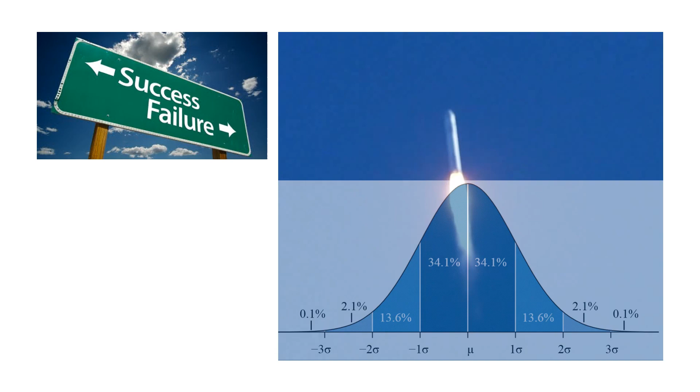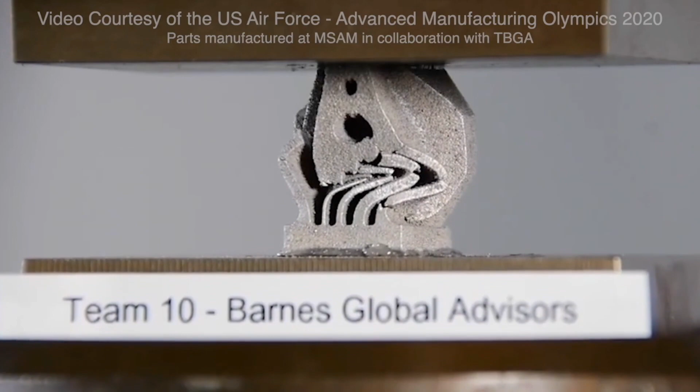Exactly how something fails can tell us a great deal about it, about its material properties, that we can never learn from just looking at the outside of a component. However, since I'm not a material scientist, I'm not going to be spending much time today looking at the impact of material properties on the failure modes of additively manufactured components. But sensing the disappointment if I don't talk a little bit about material failures - here is an example from a 2020 Penn State paper where we have a vocabulary to describe process flaws and a taxonomy, and we're going to need exactly these kinds of things, a vocabulary and a taxonomy, to describe all levels of failure in additive manufacturing.

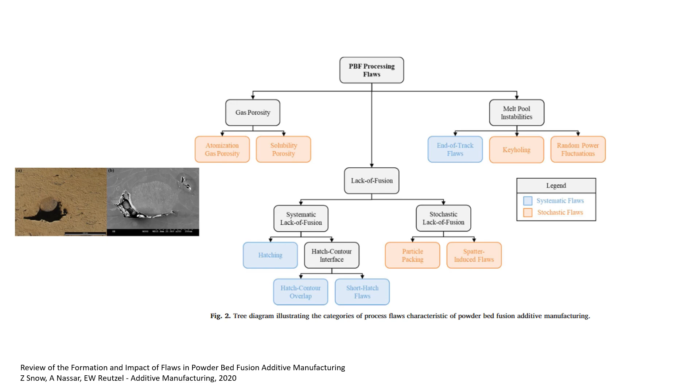So I said earlier I was going to use aviation to frame a lot of this discussion. If we look at failure in aviation, in the early days, back in 1903, nearly 80% of failures were machine related, whereas today, nearly 80% of failures in aviation are human related. We're going to find the same is somewhat true in additive manufacturing, where our state of evolution is probably between these two points.

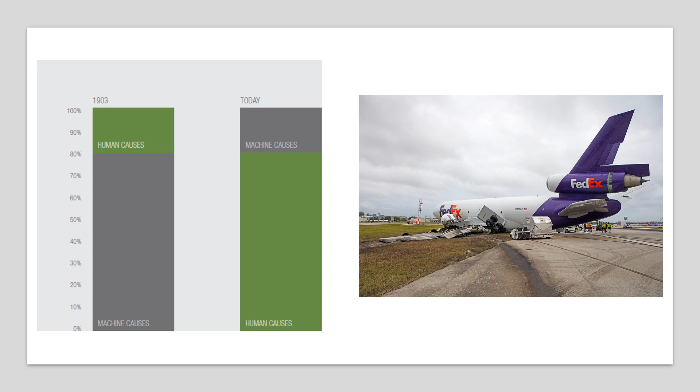Building on the previous slide where we saw that 80% of aviation accidents are human related, here Siemens is saying that potentially 80% of additive build failures are due to incorrect build orientation and/or support strategy. They have a software solution for this, and just as aircraft may have some very sophisticated software solutions, still oftentimes it's humans that are doing this. So maybe we have an 80% human related failure cause here, which is build orientation and support.

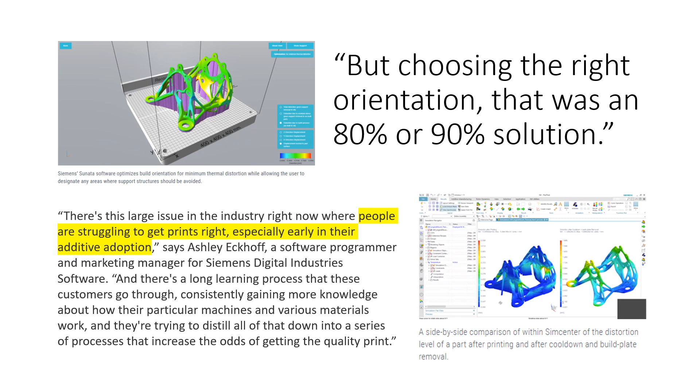So let's have a look at that in a little bit more detail, to make this real. Let's look at how this 80% of build failures or small failures may be related to orientation or support. This is an example from ADEISS, a medical device. The build orientation is as shown in this image here on the left - up is the build direction, and we have a fairly organic shape, and then a prismatic shape. After it's been printed, the rectangular shape here has some distortion, and this turns out to be unacceptable.

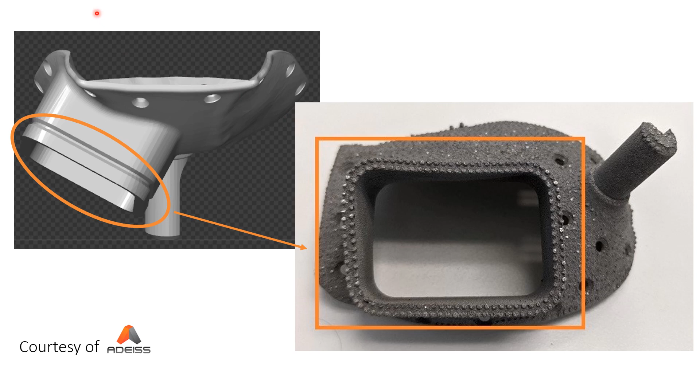This is a small failure, not catastrophic, but the question is, what was the cause of this distortion? So what we've done here is use simulation with a nominal 50mm, 1mm thick tube that's tipped over at an angle, and this is the result of the simulation using Autodesk Fusion. We can see our eyes automatically drawn to the area of maximum distortion here. The distortion's been exaggerated by a factor of 20, but really the distortion we're interested in is the opening of the aperture at the bottom here.

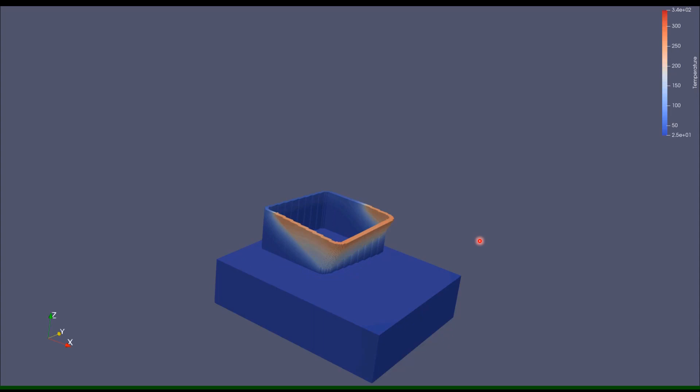It's still somewhat difficult to see what's going on. Number one, is that distortion what we saw? And even if it is, what was really the root cause? Let's have a look at this temperature evolution over time, which can often tell us a lot about the root cause. What we can see here is that the tube, because it's been tipped over, the corner of the tube at the bottom becomes very hot earlier on because all of the heat has to flow through that small area, and that's really the root cause of the distortion. If we want to fix the distortion, we probably need to orientate that tube normal to the build plate. So here we're using simulation to inform the root cause for the failure.

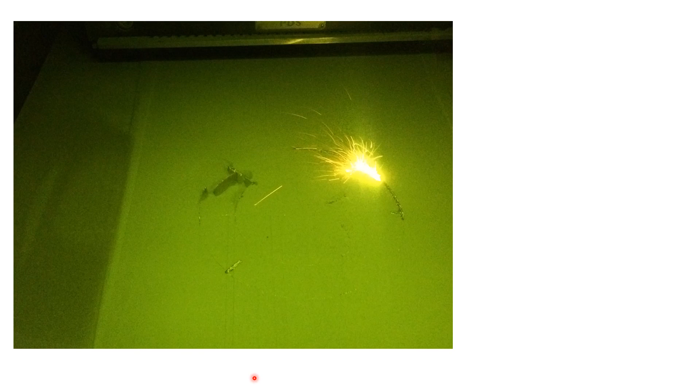So this is an example. It is actually a support failure, not orientation as such. The build had been produced subscale successfully, and then we came to do a full scale build, and here the support structure, which you can see here, has actually moved during the build and redistributed powder. You shouldn't normally be able to see any support structure sticking up like that.

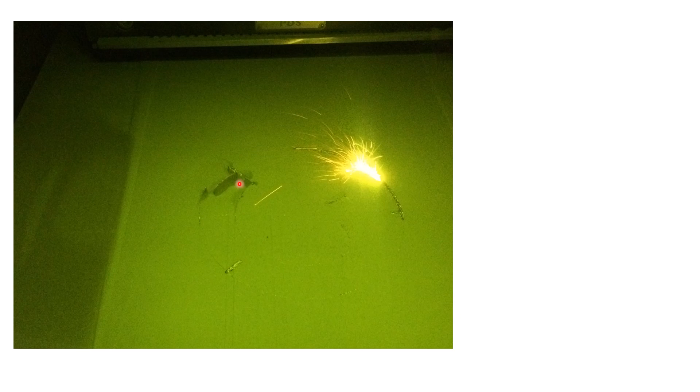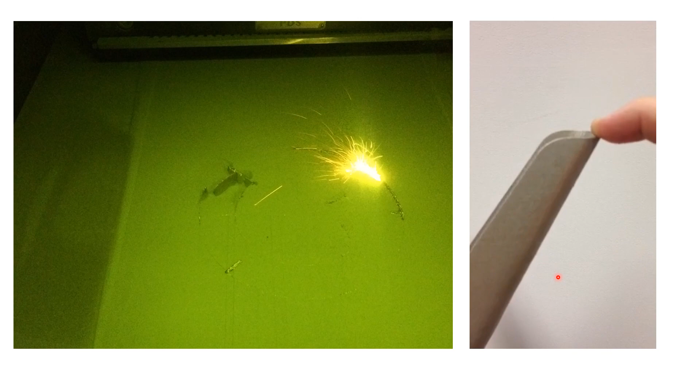If we have a look at what went on when we built full scale from this video here, we'll see what happened. The component became very tall and flexible and vibrated. So we had a failure at full scale when the support became structurally unstable.

Continuing on our theme that 80% of failures may be down to orientation or supports, let's look at another one, again down to supports. Initially we built the part subscale, a reduced build volume about 100 millimeters across. We have a prismatic structure here, supported by a gyroid lattice. This built okay. We also built two sample lattices here, called Voronoi lattices. They also appeared to build okay.

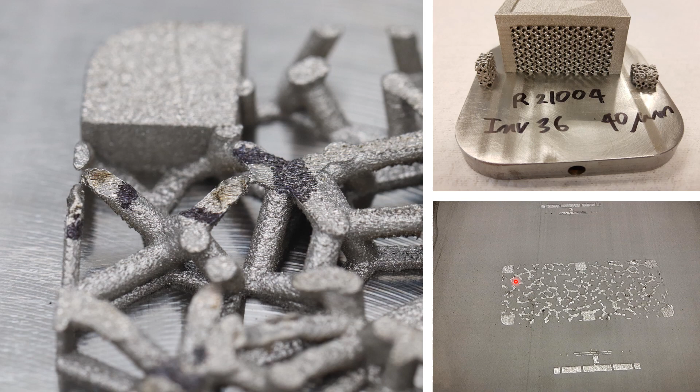So we went ahead and went full scale. This is now 250 millimeters across, but we also replaced the support structure underneath this table with the Voronoi lattice, and you can see now in this build, this is what an unhappy build looks like. These parts sticking up cut the recoater. The structure is very unhappy, and indeed we had to stop this fairly early on because the Voronoi lattice, while it appeared to be okay at this scale on the top right, by the time it was scaled up, overhangs that maybe were only 1 or 2 millimeters here had now become 4 or 8 millimeters, and the part was very unhappy, as you can see.

We're going to continue here with the joy of lattices. We're still building this same structure from the previous slide, still 250 millimeters across, but now we've replaced the Voronoi lattice with the gyroid lattice. Fairly early on in the build we're seeing some cuts appear in the recoater. This line here, the recoater is moving from top to bottom in this direction. This is a cut in the recoater.

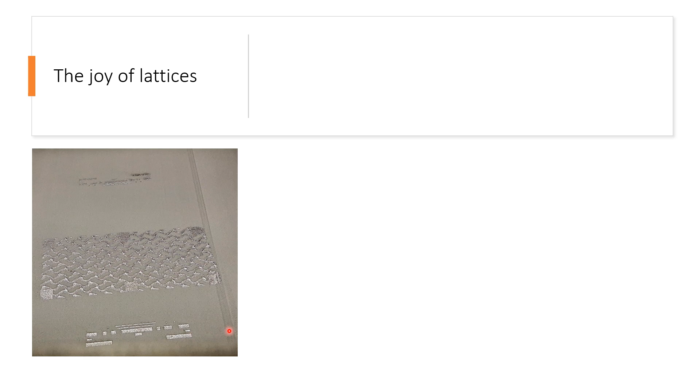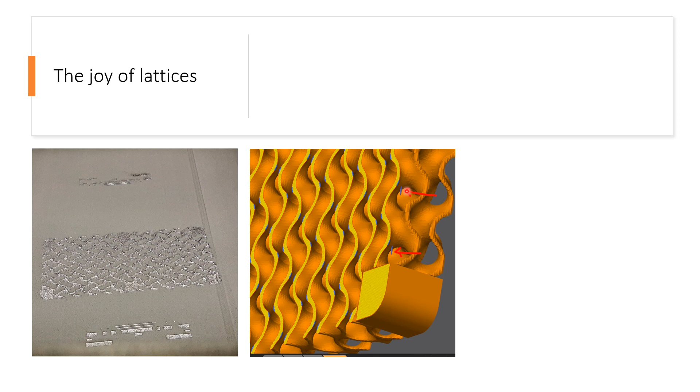So we immediately went and looked at the data we had, the build file, and saw unfortunately that the lattice is unsupported at the edges. It's just the way it's been truncated here. So these islands that are arrowed are completely unsupported areas, and that's a no-no in laser powder bed. You can see this is the result. This is as far as the build got with these unsupported islands.

So called it 50 shades of gray and 50 gig of data as well. These lattices can become computationally very intensive, and that can be problematic. Also, if you look very carefully, you can see the lattice is not completely joined properly to the prismatic body. That can also lead to some failure. So there are some interesting organizational and computational issues that can come up with lattices.

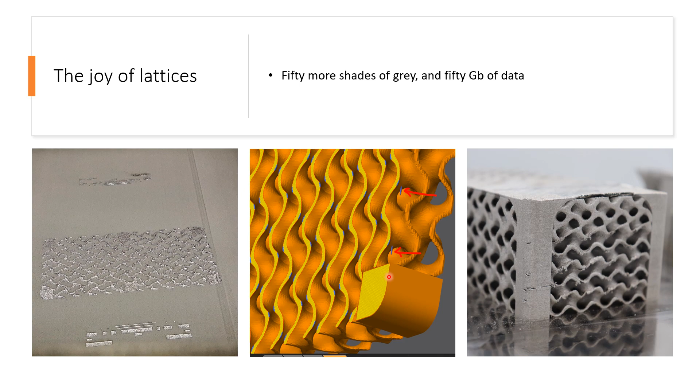Earlier on, if you remember, we talked about how in the early days of aviation, maybe 80% of failures were down to the machines. This particular failure illustrates how additive is maybe somewhere in between those early days of aviation and the more mature aviation industry we have now.

So we came in to find the machine in this condition where there's a lack of powder all at the front here. This is a catastrophic failure. It's not that we're actually out of powder - there is still powder in this hopper here. But what's happened overnight is the overflow system of the machine has filled up, leading to an accumulation of powder in the corners of the machine, which has prevented the mechanical dosing action. It needs to push on these plungers here in order to dose powder out of the hopper. So the machine, while it still has powder in here, hasn't been able to actually dose powder correctly.

So we've had a failure, and we could argue that maybe this is down to human error, that the operator shouldn't have let the overflows fill up overnight. Of course, that's easier said than done. Or we could look to the future and say more modern machines in a more advanced state of evolution will automatically recirculate powder, and failures like this will become rare.

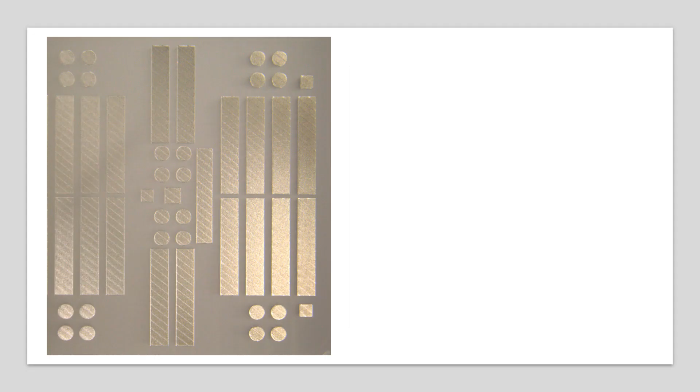Okay, let's just finish up. Remember, we said that maybe 80% of failures are down to support or orientation. I'm going to argue this particular failure is maybe down to orientation. We're building some tensile bars that are oriented horizontally.

At the end of this particular slice, everything looks fine, but on the next slice we can see something's definitely gone wrong in this corner here. In fact, what's happened is the bolt in the corner of the substrate has actually sheared off and caused all of the powder to vibrate up and redistribute itself. So that's a catastrophic failure.

So one of the questions with a failure like that is, was that down to a machine error? Should the bolts have broken? Or is it down to orientation, and the bolts were overstressed and would never have held up? So we can use simulation - in this case a Netfabb simulation after the fact - to look at what the stress distribution is like. In fact, we can see in the corners of the build plate here, the stresses are indeed predicted to be unexpectedly high. So the solution here was to use higher strength bolts, and if further strength improvement was needed, to use a thicker substrate.

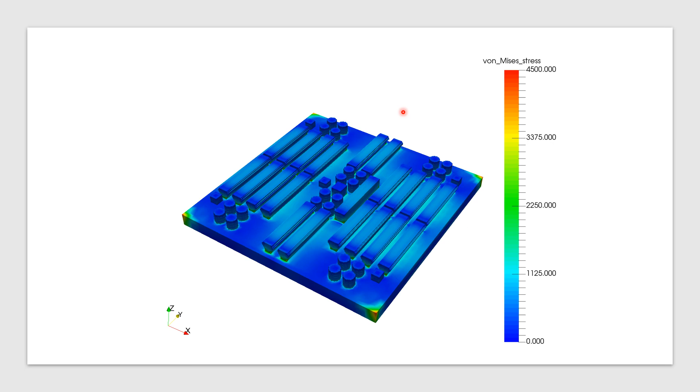So far it seems all we've done is look at failure. We haven't learned from failure. I'd like to look at the work of cognitive psychologist Manu Kapur, who talks about how productive failure can be used in a system he calls design of learning to improve outcomes.

One of Manu's thought experiments is this: imagine we give a toy to a group of children, split into two halves. For the first half, we explain how to play with the toy before giving it to them. For the second half, we simply give them the toy. The question is, which group will play more creatively with the toy? Most people would say it'll be the half that hasn't been shown how to play with it.

Now, this isn't the way we normally teach. We normally give knowledge first through direct instruction. The other thing we need to do is get people ready to see—an expert will see things a novice will not see. All of this can feed into a design of learning where we set people up to learn more effectively.

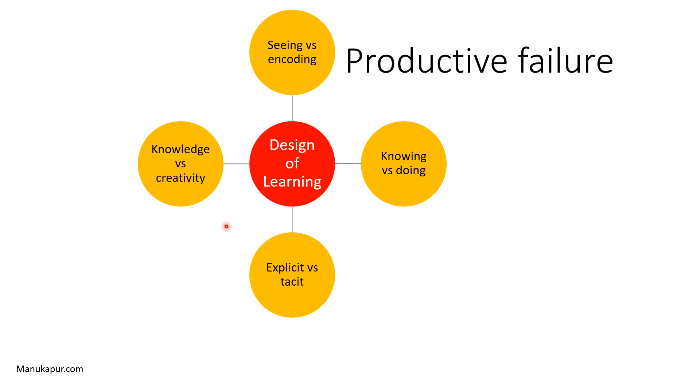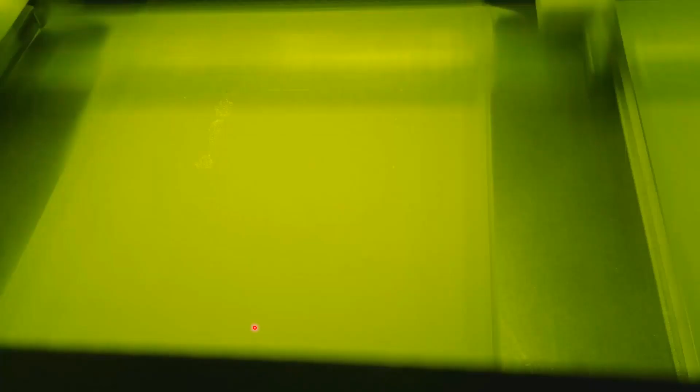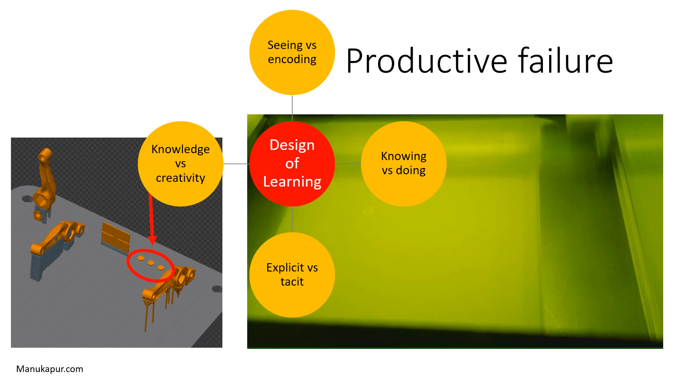For additive manufacturing, we've talked about how supports are so important, but maybe rather than explaining all of this, the first thing we do is simply run an experiment. We build three disks with no supports underneath them at all. Here they are. Then we get people to reflect on what happened and why. I think productive failure is a great way for us to get deeper understanding and more transfer.

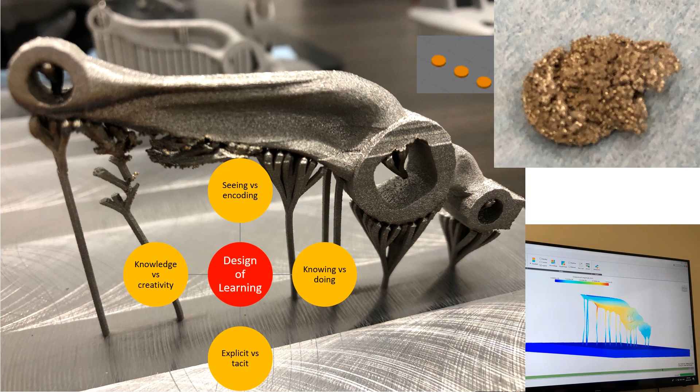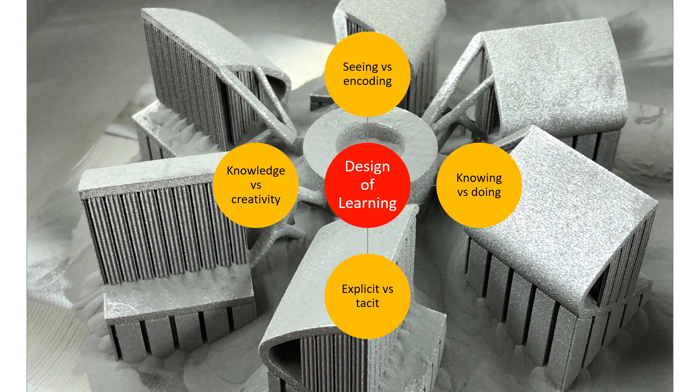The question is, how do we use additive manufacturing safely for people to experiment? Should it be with real builds, or with simulation? Software is probably the lowest risk and lowest cost way to allow learners to explore this new toy, to be as creative as possible, and come up with new solutions, orientations, and support structures—ultimately leading to a much deeper understanding of the process.

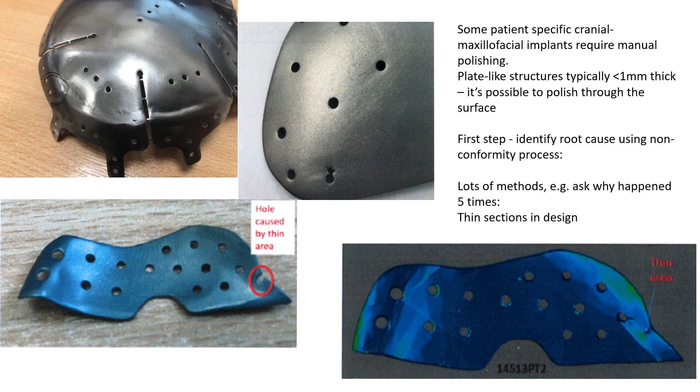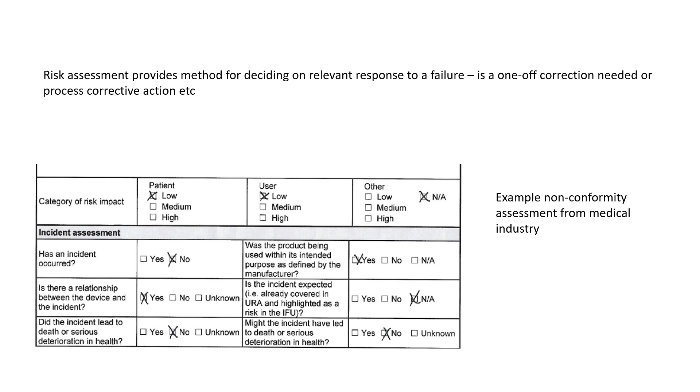In a regulated industry, the first step after a failure like this is to record it as a non-conformance and conduct a risk assessment to decide on corrective action. With a relatively new technology like additive manufacturing, it's unlikely all failure modes will be known ahead of time, so it's important that the failure modes and effects analysis matrix is a living document. Failures are fed into this and root causes examined to understand whether mitigation strategies or process improvements need to be developed, depending on the risk associated with the failure.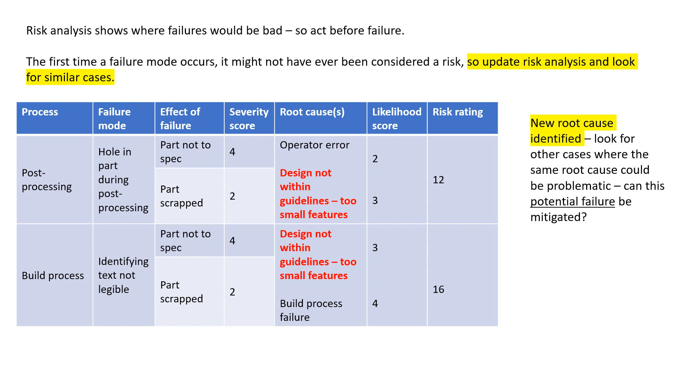In this case, for the cranial plate, a new step was inserted into the work process to inspect the thickness of the device and ensure no areas were too thin for subsequent downstream processing.

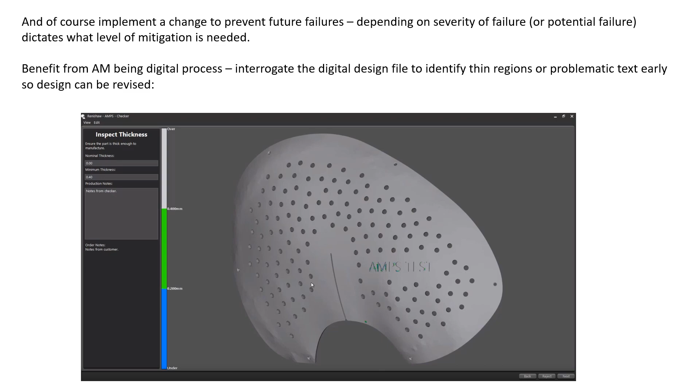So how can we all learn from failure as a community? There are some efforts underway already on social media—#AMWTF with Tim Simpson and Pete Zelinski posting failures. We also have a series of webinars from GE, Siemens and others, and random posts on social media where somebody's come across a failure and is asking for advice.

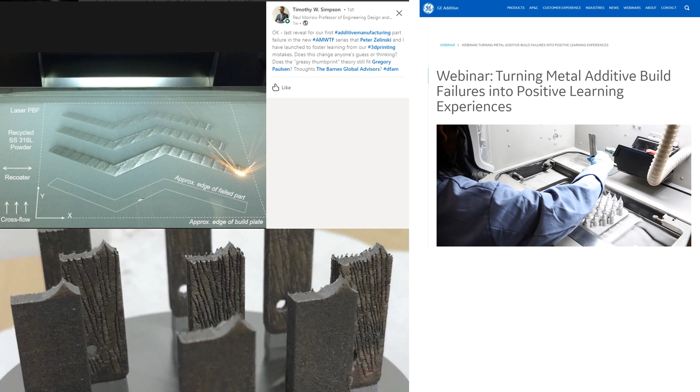Right now we have the beginnings of sharing failure, but what we really need is a more holistic way to bring all of this together. I would hope, coming back to my aviation theme, that we can learn from the aircraft industry and report incidents—not necessarily accidents or catastrophic failures, but just incidents.

This is an example from the NASA database, with over 113,000 incidents reported over roughly a 26-year period. These are categorized by phases of flight, which could correspond to the build process if we're talking about additive manufacturing, and again where the root cause potentially was in the problem. I would hope we can develop a system like this for additive manufacturing, where incidents can be openly reported and shared, so we can develop new boundaries to make the process safer and better for everybody.

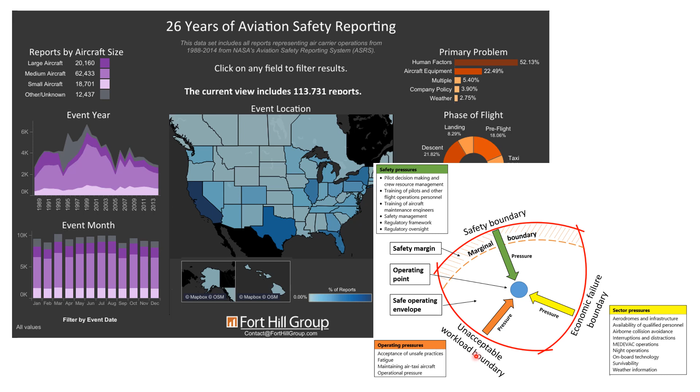Maybe my audience participation question right now would be about that very artistic image in the background—who first posted that on LinkedIn and what exactly is going on?